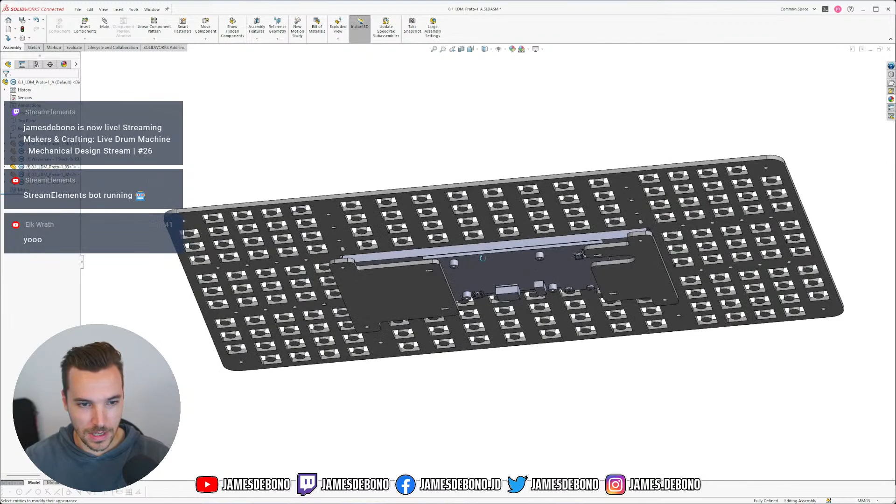I'm into designing products for making music. In this stream we've been working on this project in SolidWorks, which I can show here - well, this isn't the main project, this is a prototype I've been doing in the last few streams, for a hardware drum machine. This thing is some weird contraption I've come up with to test button and knob positions.

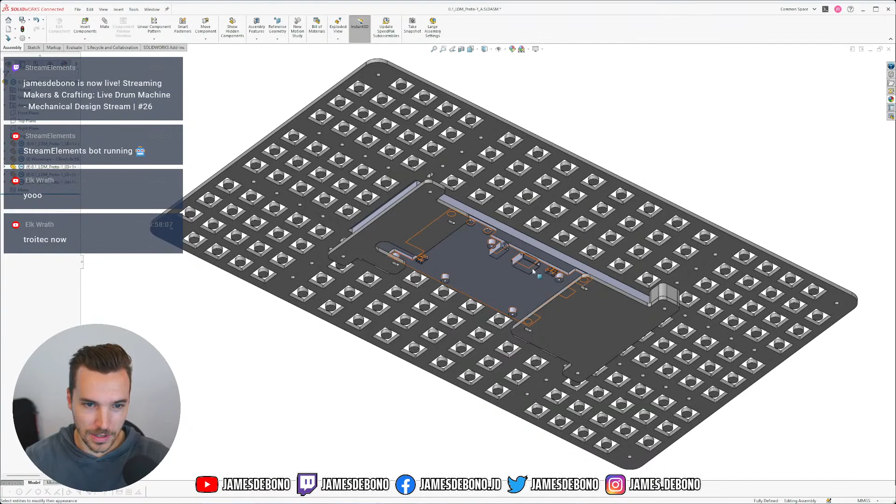So this is basically a big sheet of acrylic, and this is a display in the middle, and this display will be able to connect to something like a Raspberry Pi.

I just finished cutting all of this stuff. So the goal of this stream is to show you guys the stuff that I've cut, and I'm going to start probably trying to assemble it here.

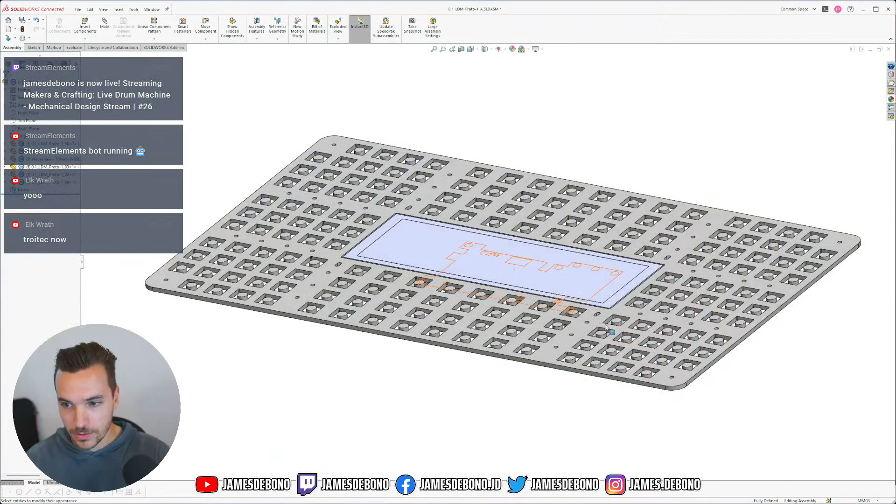This button. I've got some parts here in bags, and the main thing is this plate, which should look quite similar to this - yeah, it's basically a big sheet of acrylic.

You can see how big it is. And the idea behind this is that it's something like a little grid that you can plug little keyboard foot switches into, and we can hook them up on the back for testing different functions, and they just clip into these square holes.

So then you'll be able to press buttons. We can wire them up on the back, and put the buttons wherever we want, so we can try different kinds of layouts, but on a large scale.

So we have this whole grid where we can test out different positions for buttons and knobs - you can see the reflection on my screen there, so maybe I'll use this side. There's also an option to put knobs in these round holes, and I'll explain that in a bit.

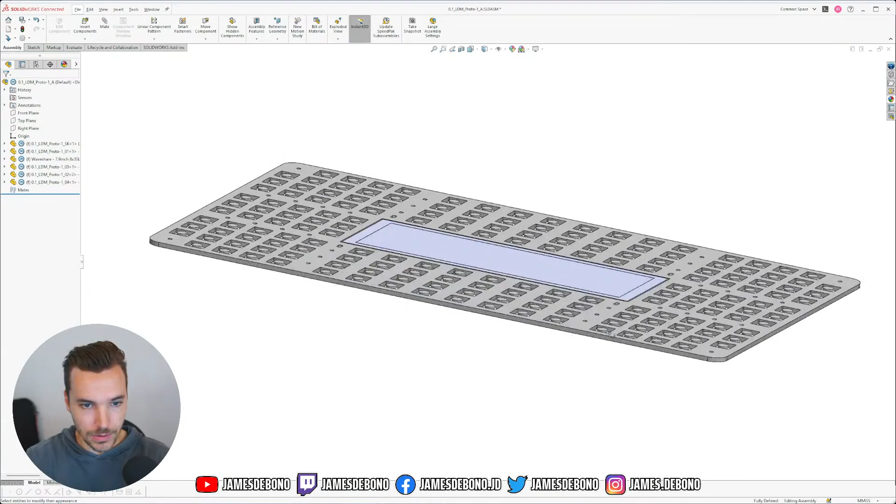But first I want to try to show you a video - this is the first time I've done this properly in OBS, so hopefully it works. This is a little video of the process of how it went from this CAD into the real thing. Let's see if this works.

I can give you a bit of commentary while it's happening, hopefully the sound works too. So here we have some computer programs set up - Adobe Illustrator, where I nested all of the parts to be cut on the sheet.

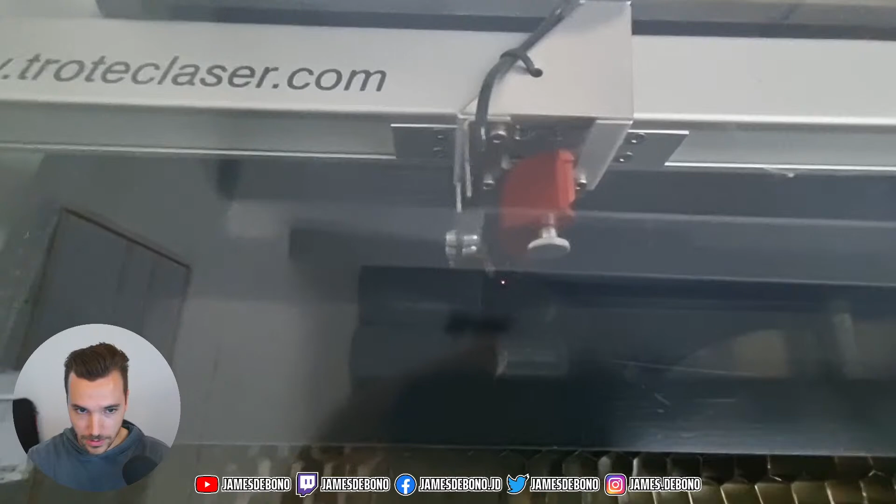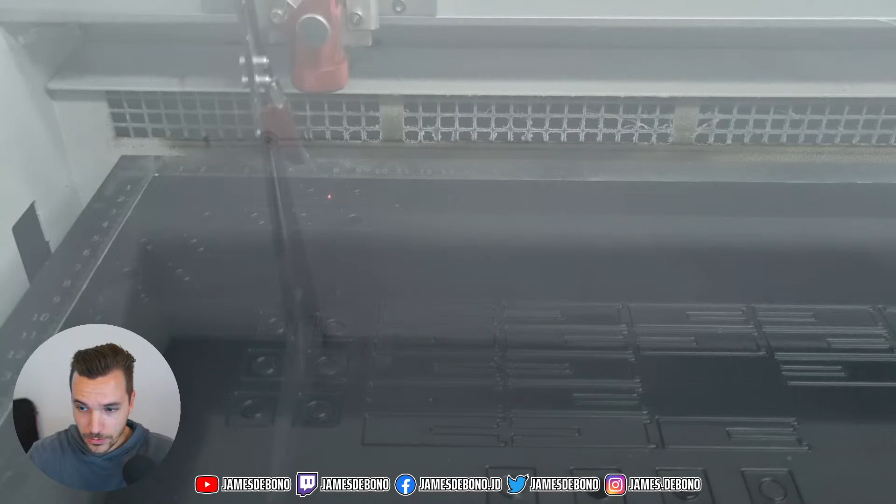And then the other computer was running this Trotec software to power the Trotec laser. Let me know if the audio is too loud - hopefully it's not, because it's basically just screaming laser cutter.

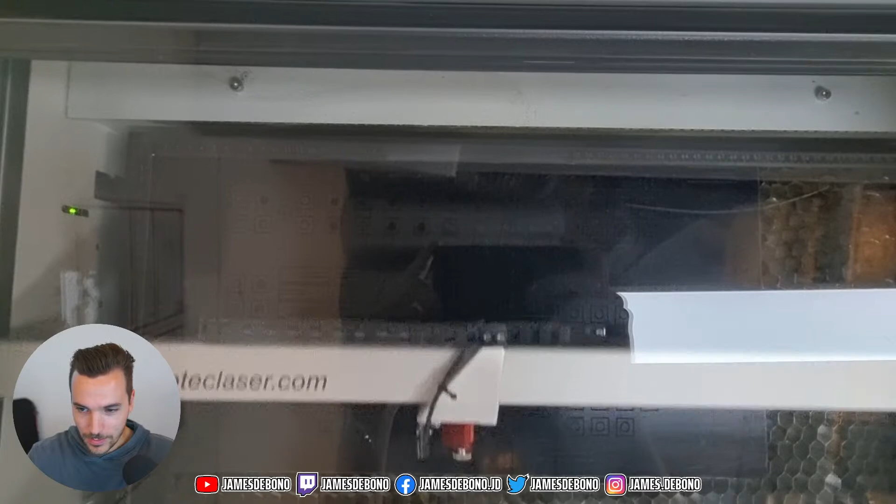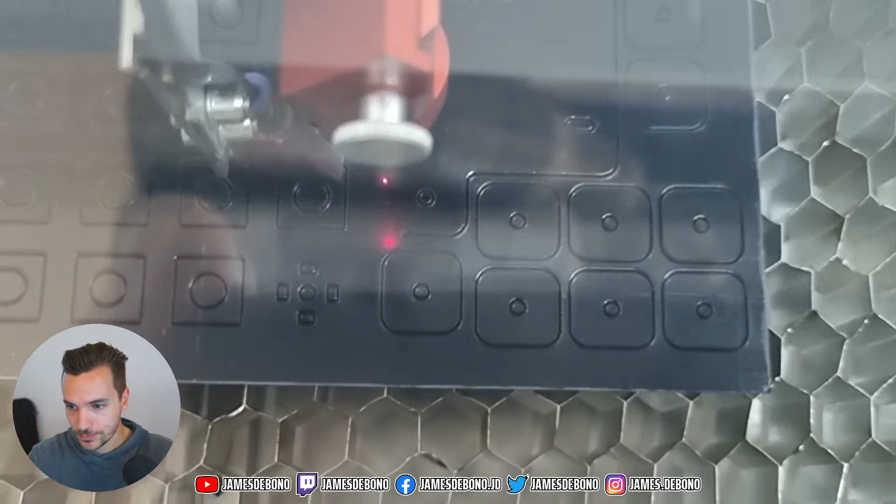The laser cutter goes around and basically burns through the plastic with a super hot laser in exactly the shape that I've designed in the CAD. And it's really quick too - this took maybe 20 minutes to cut.

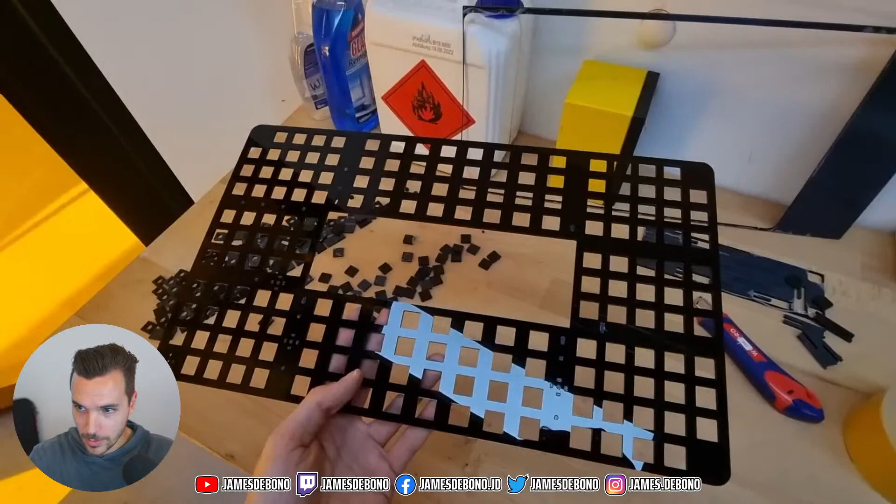I just bought one sheet of acrylic that's 3mm thick and basically used the whole sheet. You can see there, it's pretty much filled to the brim with parts that have been cut. So I had to break out the parts, got a big pile of parts, and you can see just how much of that sheet I used.

There's almost nothing left. I've designed, after the CAD session last time, these little legs that will fit into the main plate just to hold it up off the table. As you can see here, I just kind of did a quick edit to the design in Illustrator to add those.

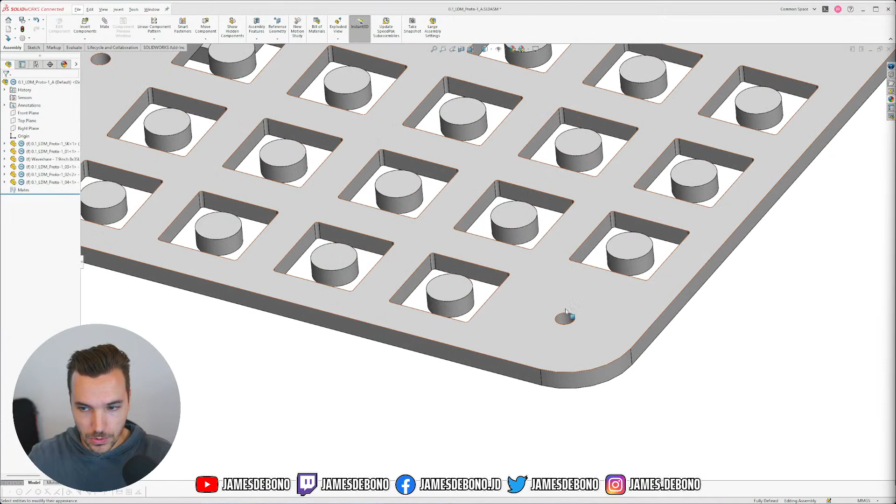Yeah, that was it, it was quite fast. But I added those legs just to keep it off the ground, because initially I was planning to just put screws in here, and then I thought, why should I go and buy screws when I can just make some little legs to stick in?

So in the actual thing you can see I've got the screw holes there, but also these 4 little square holes around it, and that will be where the legs go in. So if I go back to my overhead camera, the plan is to try to glue some of these things together. I'll probably put some paper towel here so I don't put glue everywhere on my bench.

I just thought I would bring you guys along for this, since I have to do it anyway. So I thought I might as well show you the process. Let me show you what parts I've got in here.

In this one, I've got these little legs. They're just 2 parts that look like this. Let me put this as a backdrop so you can see it clearer. One's open at the top, one's open at the bottom, and they've got these little tabs at the top. They slide into each other like this, and these 4 little tabs fit into the 4 holes like this. So it sticks up like that, and I want to glue them in so they're not just wobbly.

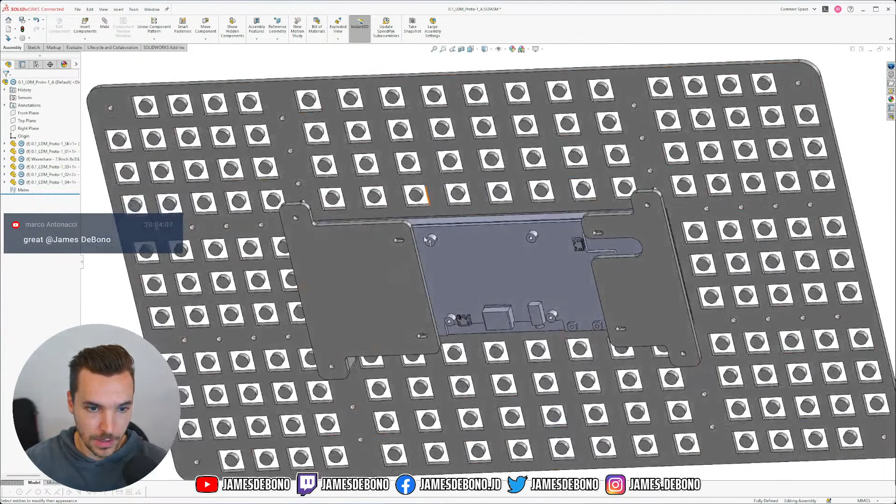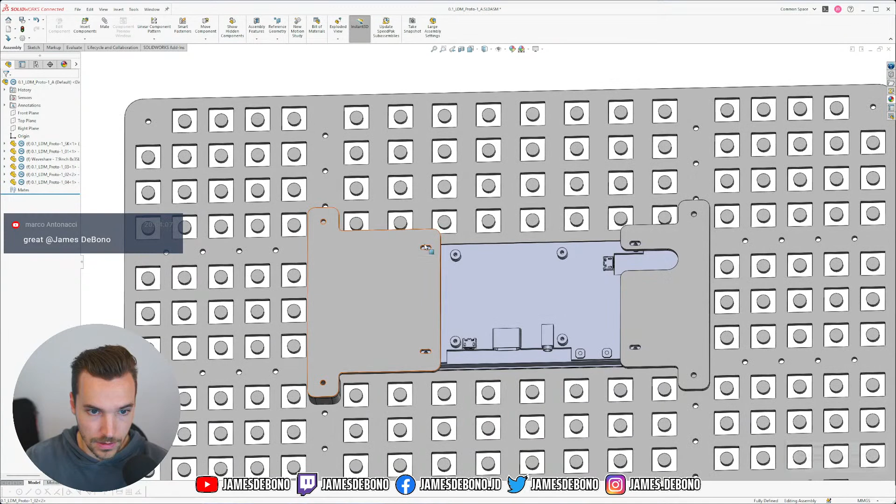We have these little plates. If I go back to the CAD, you can see the display has these holes, these screw bosses here. These plates will screw into the display, and then with some spacers like this, they will screw into the top plate. The top plate is slotted vertically so the whole thing can be adjusted vertically. And these holes are slotted horizontally, so the whole thing can be adjusted horizontally.

Now, I didn't have 11mm thick material to make that spacer, so what I did instead is cut a bunch of little spacers that are all 3mm thick, and the plan is I'll just sandwich them together. Maybe I'll even glue them together. So 4 of these will be 12mm thick, which is a bit more than I wanted, but it'll just mean the display is recessed into the top plate a little bit. And if it's too much, I can unglue it and put a different spacer on there.

Yeah, that's 13mm. That's 9.8, so that'd be not enough. But this does have film on it, and I need to peel the film off, so that'll make it a bit thinner too.

So that's one thing. I can put these back in the bag. Sorry, that's the second bag of parts. And then the last bag is...

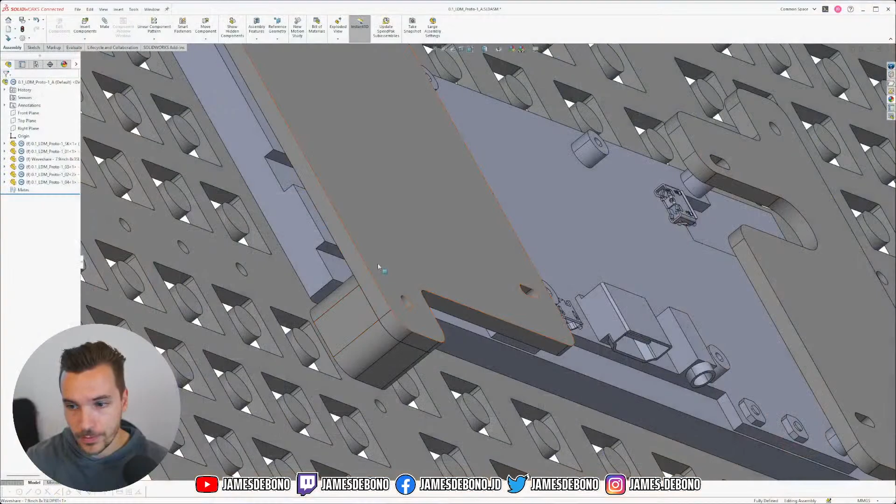These little squares. If I show you one up close, it's a square with a circle hole in the middle. These are what was left when I cut these squares out. This is why in the CAD you can see all these little circles. They weren't actually meant to be parts. Those circles were just there to give me a circle cutting line, so that when it cut out these squares, they would have a circle in the middle.

The reason for that is I can get a knob and put the shaft through that hole, holding it in here like this, and put a washer on the top, and the washer is slightly bigger than the square. So when I put the nut onto the knob and tighten it, it'll hold itself in there. So these are just little knob adapter squares.

They will basically keep them. So anywhere in any one of these squares, if we decide we don't want this to be a button but a knob instead, then we put one of these squares in there, put the potentiometer through it, put a washer on it, put the nut, and now that square is a knob. Hopefully that makes sense.

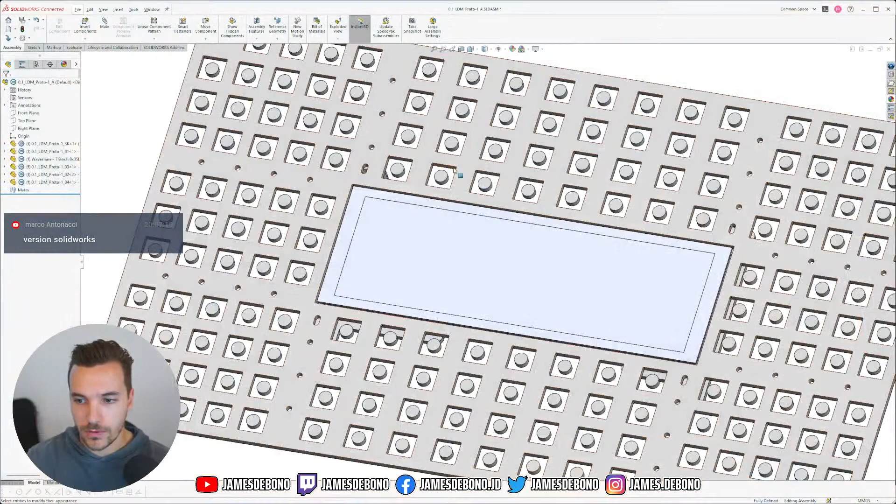Marco asked about the version of SolidWorks. The version I'm using here is the latest version, SolidWorks Connected - SolidWorks for Makers if you know of that, it's a subscription model. You pay monthly and it's reasonably well priced, like $10 a month or something. I guess this is the latest, 2023 edition.

I don't need to do anything with these squares today, because these will just be here for when we need to put some knobs in the layout. When we do that, we may or may not want to peel off the plastic film. Some of these have plastic film on them, some already had it come off, but we can peel that off or not, it doesn't really matter. So that's it for these.

So I think the first thing I want to do is glue together the legs, and then glue the legs into the top plate.

Yeah, that's what I want to do. So I was test fitting some of these before, and some of them didn't fit. I think it's because they didn't quite cut very cleanly, or the material was too thick. So I'm just going to test that they fit before I glue them, because if they don't fit I need to sand them down a little bit.

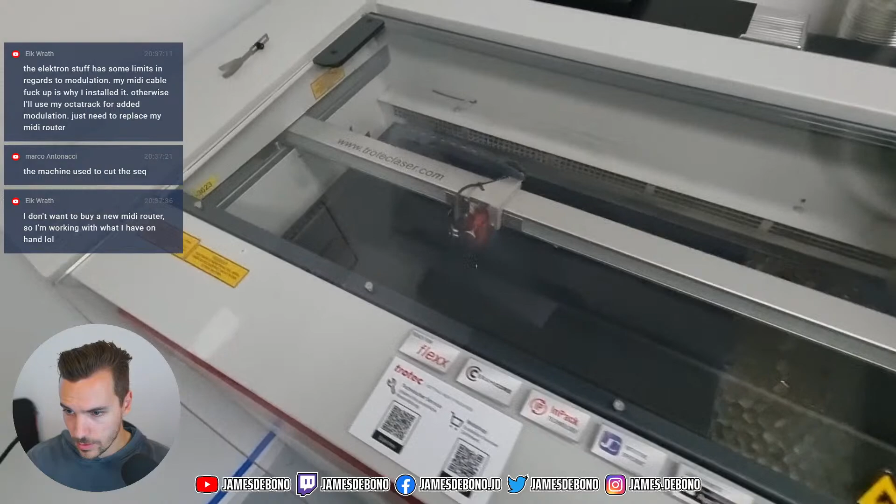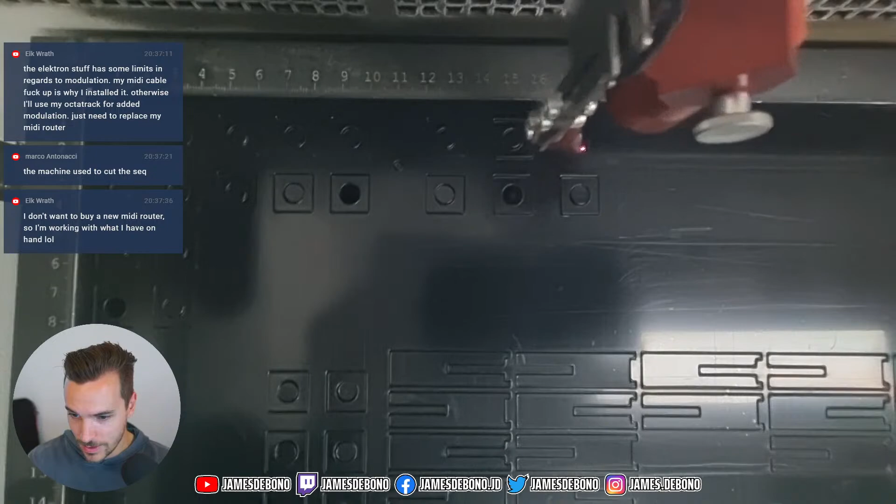The machine used to cut the sequence. The machine - yeah, let me play the video again for you. I don't know if I can pause it, but it's a Trotec something. Can't remember, sorry. I can look it up.

Trotec laser. Let me show my screen. Which one would it be? Perhaps this one? No. Speedy series, I think it is a Speedy series.

Sorry, the website's in German, let me see if I can change that. Speedy... I would guess, I think it's this one. Yeah, Speedy 100, so the bed is 600 by 300 basically. Speedy series indeed, yeah, Speedy 100. That's what I used to cut.

But yeah, the noodle box allows you to draw in your own curves and shapes, like an Etch-a-Sketch. Then you can assign MIDI channels and layers/pages. It's like being able to draw custom modulation curves. Dude, that's sick, because that's like something nice you can do in a DAW, but being able to do that in hardware is pretty cool.

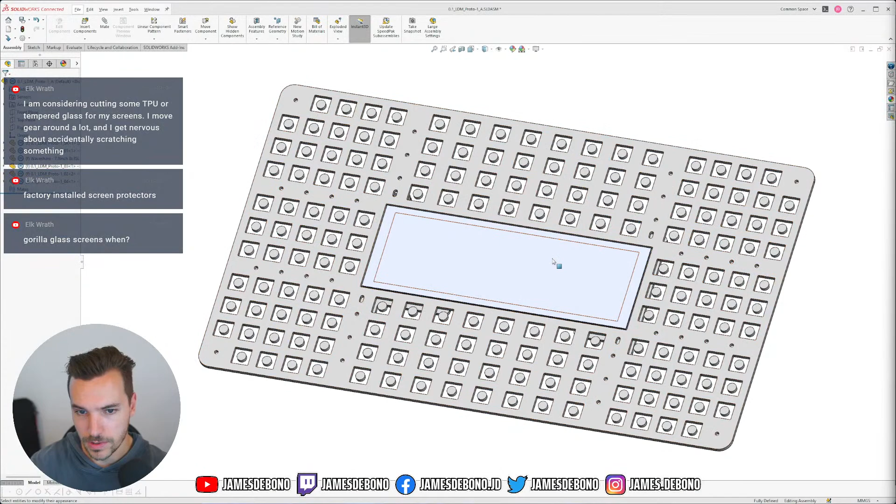Factory installed screen protectors. Gorilla Glass screens when? Well, I think this screen has Gorilla Glass on it, pretty sure it's some kind of tempered glass. But yeah, when? I don't know. Hopefully this product, when.

Alright, how am I going to line up this hole and glue these together? What have I got that's got an M3 screw in it?

I only fuck with sapphire glass screens, bro. Do a diamond screen for you, it'll be pretty scratch resistant.

I do have a mod dwarf here which has an M3 screw in it, but I don't know if it's long enough. Oh, actually, I might have something, give me one second. I don't have an M3 screw, but I do have some cheap drill bits, so I could probably just stick this 3mm drill bit through the hole. Yeah, perfect.

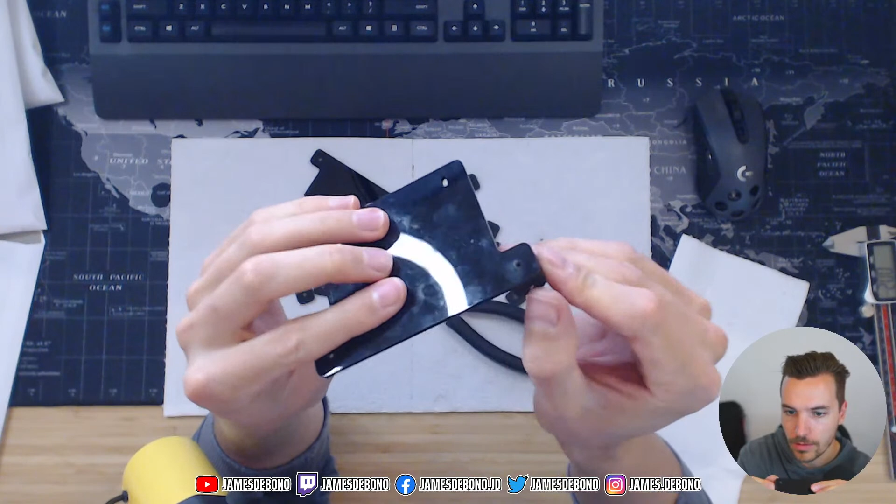Okay, see that? Got our little spacer on there. The hole goes all the way through. You can see what camera I'm using if I do this - shout out to Logitech. Okay, let's do that again.

So, Elk, for this product, seeing as hopefully you'll be the first customer, what would you request as a screen protector? Not printed, I'm assuming.

Oh my god, this glue sets so fast.

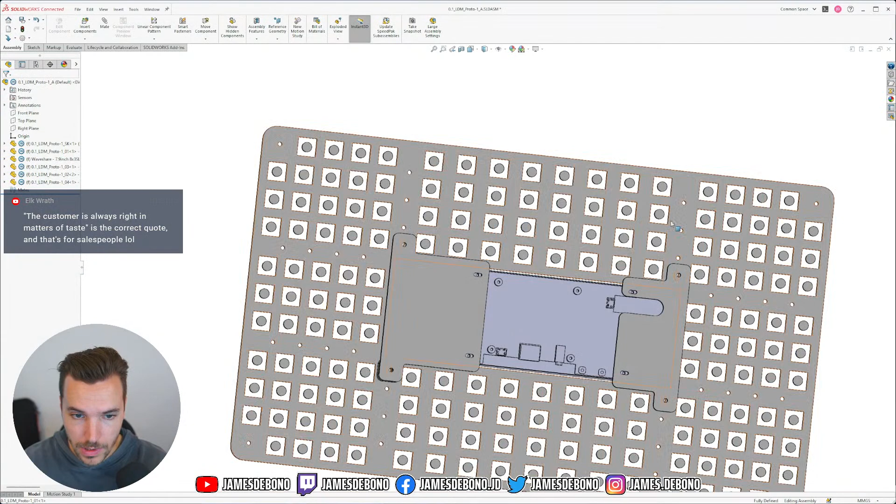All right, two spacers. That's done, gonna do this one. Now this one's symmetrical, but this one, I need to make sure the spacers are on the correct side. So if I'm looking at it... if we look at the CAD again. Oh wait a minute, this isn't symmetrical. So the question is, did I do it on the right side or not?

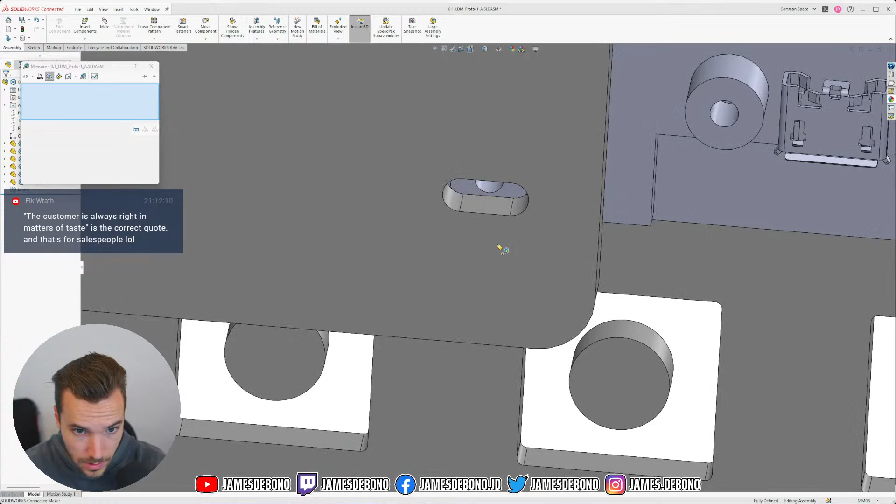9.21. .91. Let's see. That says 9.12, 9.12, 9.6. So the bottom one's bigger. So luckily I accidentally did that correct.

The customer is always right in matters of taste, is the correct quote, and that's for salespeople. True. But a film is a matter of taste, right? Make the film polarized so it has to be removed regardless, lol. Yeah, the screen just doesn't work if you don't remove it, you just can't see any of the pixels.

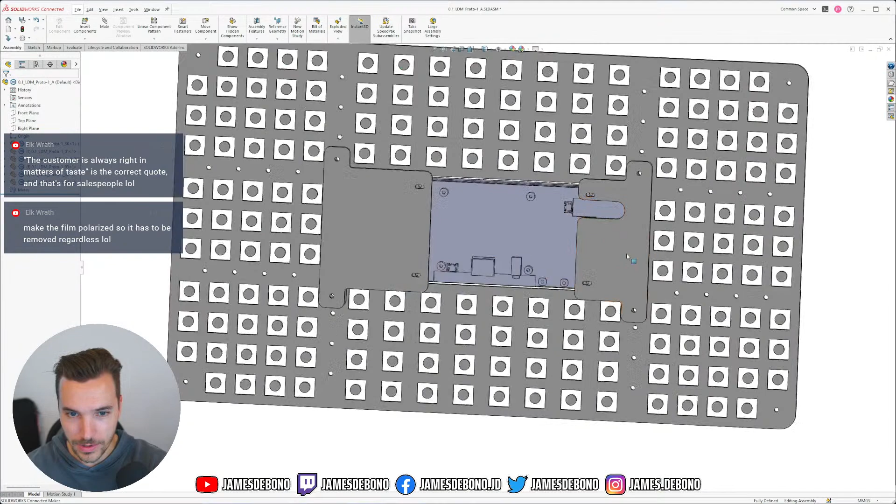Okay, so back to the CAD. With the slot up here, the spacers need to be on the back. So with the slot up here, I need to put the spacers on this side. I'm going to put it this way.

Yeah, I don't know. I'm thinking, if the display doesn't already have a film on it... see, I've been planning this device actually to have a transparent display protector, but if it's going to be a touchscreen display, that's not really going to be possible, because you'll need to touch the screen, so it can't have any material above the screen.

What are we talking about here? Can't film the screen either, lol. Oh, the polarized thing, true, didn't think about that.

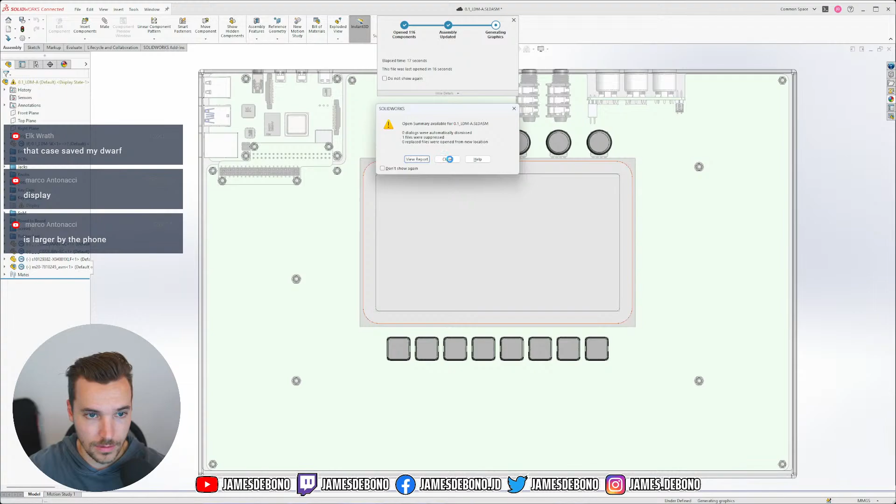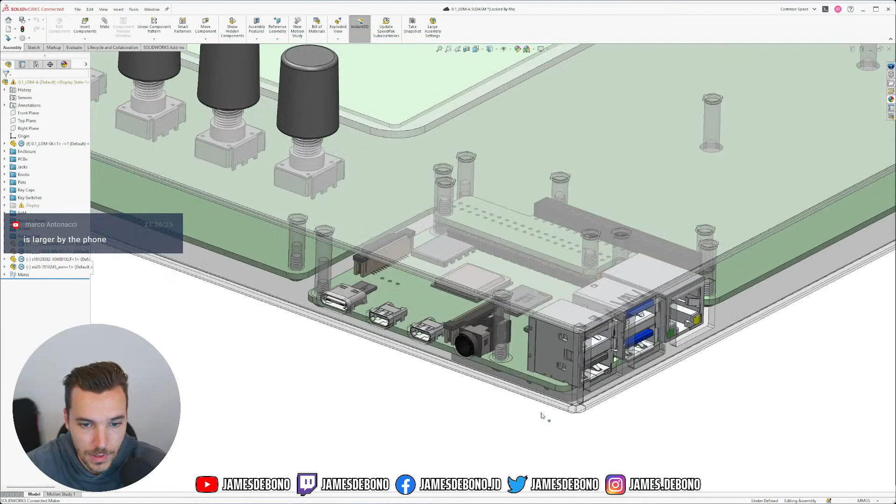It's larger by the phone, the display will be larger, yeah. And speaking of display, in the main CAD, the display is now missing because I accidentally moved the file, but also we need to change the display anyway, so that's going to be in the next video, I guess. Changing the display and also changing this Raspberry Pi, it's going to get replaced with a Jetson Nano.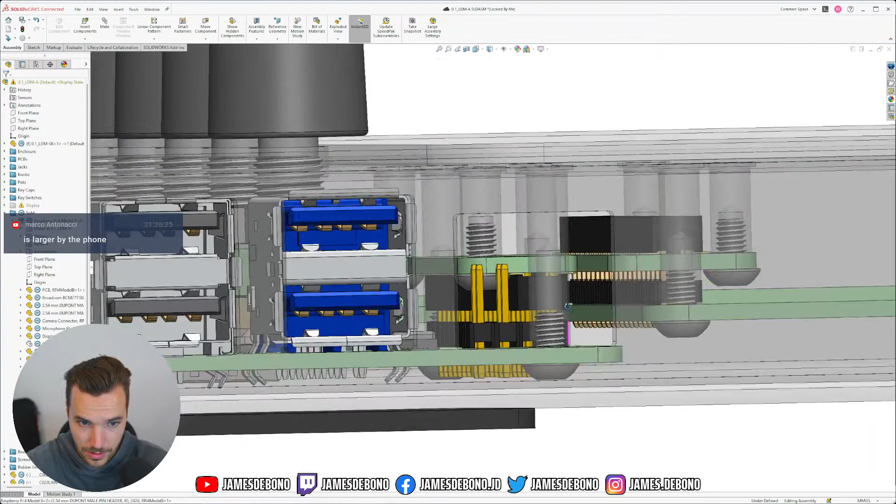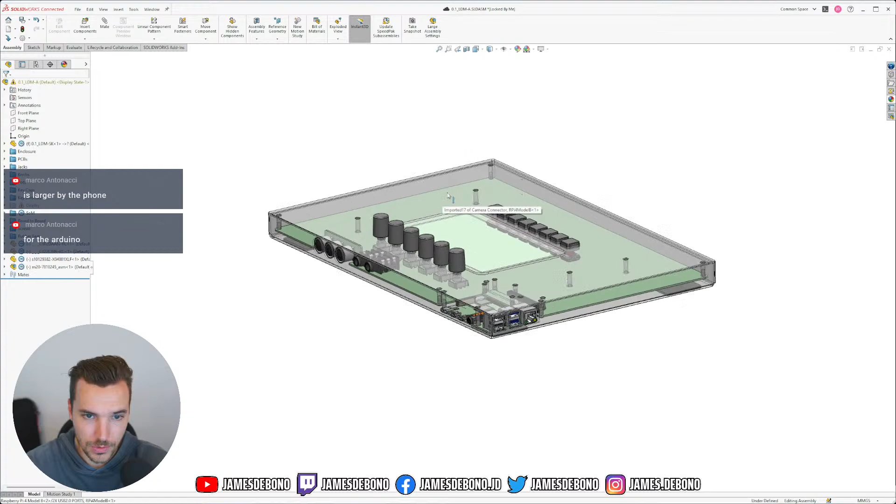So even though I found this cool solution for this little PCB adapter board, where this could plug in here and this could plug in here at different heights, I'm proud of that solution, but it's no longer needed. For the Arduino - no Arduinos here, this is a Raspberry Pi, and we're going to change to a Jetson Nano. But yeah, so that'll be the next video.

And for now, this is going to go to Yessa for testing. Yeah, I think that's it for now. Might have an early night. Cool.